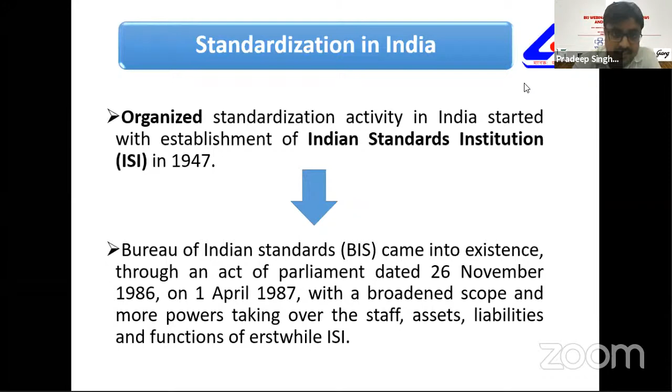standardization in India. Actually, for every good practice, there is a need of standardization. So standardization in India started with the establishment of Indian Standards Institution in 1947 before independence. Then after, Bureau of Indian Standard came into existence through an act of parliament dated 26 November 1986, on 1st April 1987, with the broadened scope of more powers, taking over the staff, assets, liabilities, functions of erstwhile ISI.

So now the genesis of BIS. As you see in the slide, first Institute of Engineers India acting as the Indian Committee of British Standard Institute since 1919. It means before independence.

Then after that, Government of India passes a resolution on 3rd of September 1946 for establishment of ISI, that is Indian Standards Institution, set up on 6 January 1947. After that, the new scheme came into existence, that is ISI Mark Product Certification Scheme under ISI Mark Certification Act 1952.

As you all know, the ISI mark is a well-reputed, popular, and renowned symbol in the field of quality control, quality aspect. We all are aware about the importance of ISI mark. So this ISI mark journey started in

1955-56. Then after, Bureau of Indian Standard came into the picture with the new name; ISI came into the picture with the new name Bureau of Indian Standard. It is a national standard body, established on 1st April 1987 under the BIS Act as a statutory body.

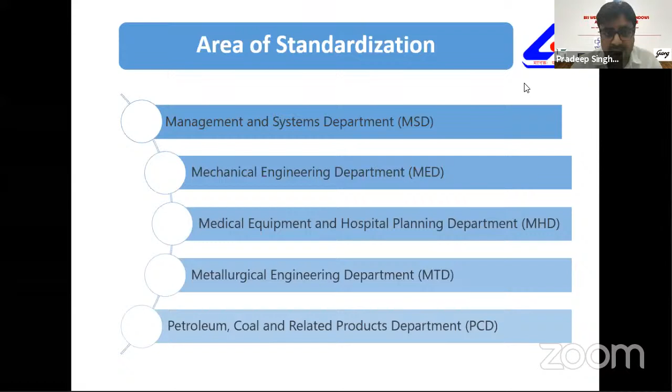So in total 16 technical departments, we are working in different areas and sectors of standardization. First, as you know, civil engineering department, then chemical department, electrotechnical department, electronics and information technology department, food and agriculture department, management and system department, mechanical engineering department, medical equipment and hospital planning department, metallurgy department, petroleum coal and related products department, production and general engineering department, service sector department.

These SSD1 and SSD are newly created departments. Now BIS is also working in the field of standardization in the service sector also. It's good news for our country that BIS has now started work in standardization in the service field also. We have textile department, transport engineering department, and water resource department.

So now I come to the civil engineering department, because we are more focused here on standards formulated related to doors and windows. These come under the civil engineering department's review. How do we work under the civil engineering department?

We have the Civil Engineering Divisional Council, under which these sectional committees are formulated. We have at present 36 sectional committees, like CED 15 and CED 11 are also sectional committees. Under 36 sectional committees, we have 33 subcommittees, then 62 panels, and 134 working groups.

Total number of members involved in all this type of work under CEDC is 3,210, and it's significant that we have formulated a total number of 1,768 standards under the CED Council. So I would like to highlight one thing, as you see the hierarchy, that the 134 working groups work under 62 panels.

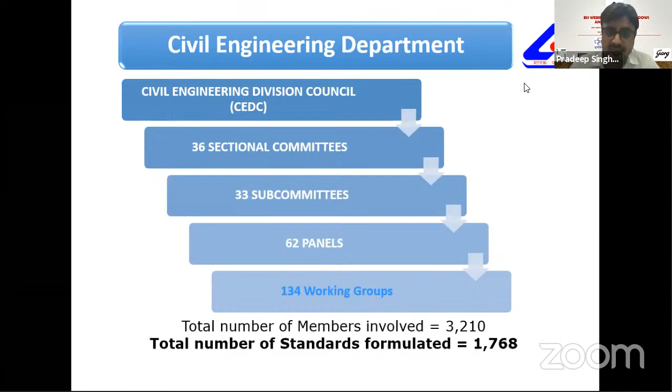Earlier we mostly had standards on a material basis. Now the overall worldwide scenario is changing and everybody is focusing on performance and safety. So now we are trying to update or modify our standards as per the latest technologies and demands, working in the direction of performance-based standards.

As I said, we have sectional committees under CEDC. As you see on my slide, we have sectional committees on cement, sanitary, building lime, floor, wall, structural engineering, timber. I highlighted CED 11 and CED 15 because we are only discussing those today.

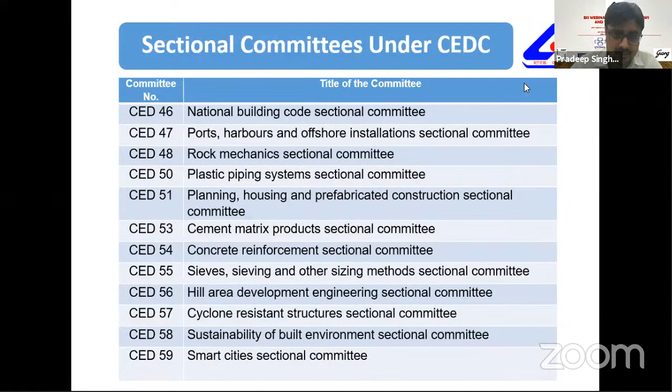Now let's see the composition of the sectional committee - how these sectional committees work and who are the technical members involved in the formulation of these standards.

So we have a good team and a knowledgeable team having vast experience in the particular area for which we are formulating the Indian standards.

First, a new work item proposal is put up either by a manufacturer, consumer organization, or any stakeholder who wants to develop a standard on their product, test method, or code of practice. So the new work item proposal comes to BIS.

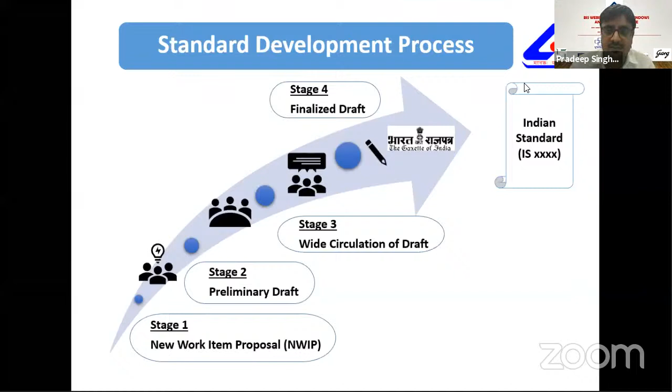So this is the whole process and whole activity, and the whole volume of work involved in developing any good, technically sound Indian standard.

Now I come to CED 11. What is CED 11? CED 11 is the Door, Windows and Shutters Sectional Committee. The scope of this committee is standardization in the field of doors, windows, ventilators, and shutters of any material.

We are also liaised with the international committee, ISO TC 162. We are the observing member in ISO TC 162, which is the Door, Window and Curtain Walls Technical Committee.

Under CED 11, to date we have formulated 27 Indian standards, of which product specifications are 22, code of practice 2, method of test 1, terminology 1, and other 1, which I will elaborate on in the next slides.

Now I bifurcate and segregate all the standards by material base, because at present we have material based Indian standards mostly. So for timber, wood and bamboo door, window shutters, we have standards IS 1003 part 1.

Part 2 for timber is specification of timber panel glazed shutters, IS 2191 wooden door flush door shutters, IS 2191 part 2 wooden flush door shutters, particle board, board face panels, IS 2202 part 1 solid core type wooden flush door shutters, IS 4021 timber doors, 4913 code of practice, 6198 specification of ledged braced battened timber door shutters, IS 15380 moulded raised high density fiberboard panel doors, IS 16073 bamboo jute.

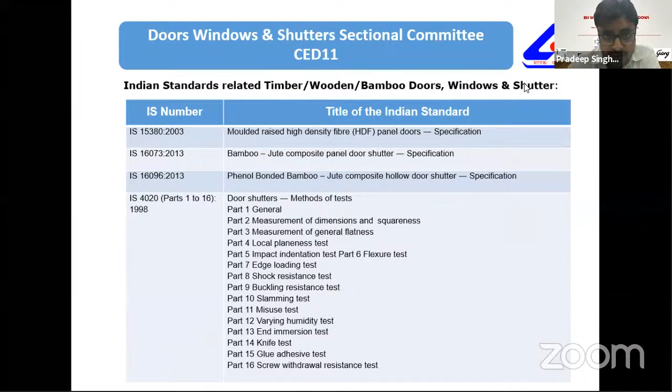Now the Indian standards related to metal door window shutters: specification of steel doors, windows, code of practice, specification of steel windows for industrial buildings, specification of aluminium windows for industrial buildings, steel door frames, steel flush door shutters. We also have two standards related to GRP or UPVC doors, GRP panel type door shutters, and solid panel type UPVC foam door shutters.

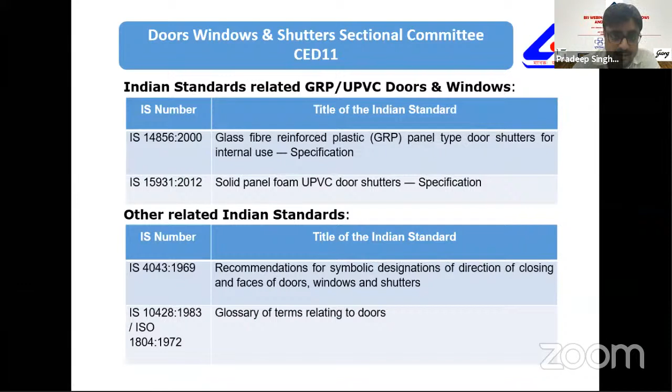We have other standards related to symbolic designation, direction of closing, and faces of door and window shutters, which is also a very important standard in terms of symbolic design. We have one glossary standard related to doors and windows.

Now, what is the ongoing work? This is a very important slide because we are working in the direction of new innovative materials, like regularly working on the formulation of a standard related to UPVC profile for door and window, which is now quite popularized in the market. We are also revising the flush door, wooden flush door standards, and revising steel door and steel door frames as per the latest technology adopted by different industries and reputed manufacturers in India.

One is the most important - I want to highlight that we are also now in the process of formulating a performance based standard, especially test methods like air permeability and water tightness. At present, this type of standard is not available in India, and most reputed industries are using international standards. So we think India must also have standards related to these types of test methods.

So now the next committee is the Builder Hardware Sectional Committee. The scope of the committee is standardization in the field of builders hardware such as door, window, furniture fittings like hinges, handles, sliding bolt, door closer, floor spring, panic hardware, etc.

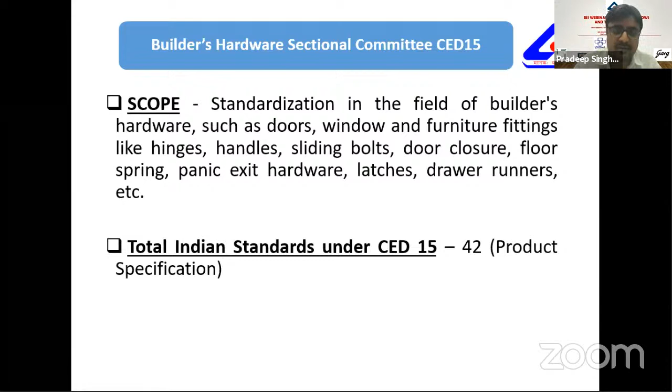Total 42 standards are already formulated under this committee, all product specification, meaning product conforming standards. So now I segregate these standards product wise. We have standards 205, 206, 362, 453, 1341 on steel butt hinges, which is a very popular standard in India for hinges. We also have standards on piano hinges and stainless steel butt hinges.

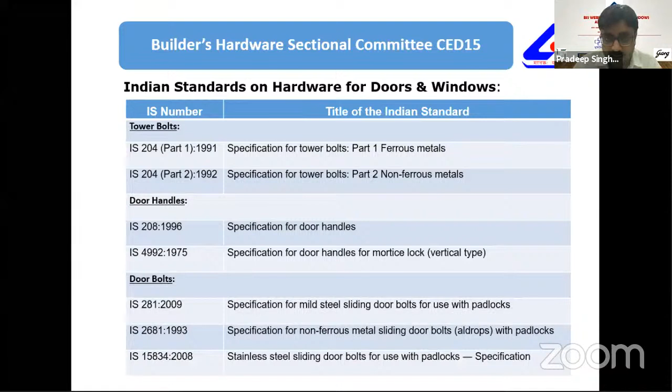Now we also have standards on other products: on tower bolts we have two standards, 204 part 1 and part 2, door handles 208, 4992, door bolts 281, 2681, 15834, sliding door bolts, stay fasteners, plastic windows 10019, mild steel stays 452, door closers, and Indian standards related to door stoppers and rim latches.

So what is most important is the ongoing work. We are working under the chairmanship of Sri Majumdar sir and under the member secretary Shri Hudson sir and Manoj sir. They are taking efforts to make standards good as per the latest technology, on the formulation of standards related to panic exit hardware, pull handles, stainless steel handrails, stainless steel door stoppers, revision of existing IS on door handles, SS aldrops, and SS butt hinges.

My request to all the stakeholders is to study or go through these standards so that you can also give your inputs to BIS in the formulation of Indian standards, so that a standard can be formulated as per the latest technology advancement, etc. So this is my presentation. Thank you everybody for listening to my presentation. Thank you.

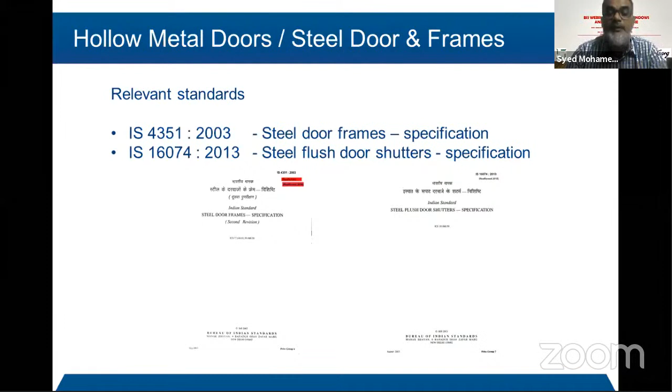Apart from this, I'd like to highlight that the entire construction industry has changed in terms of how the wall is constructed, and the kind of doors you're going to use in a building, because you've got multiple options available, as rightly pointed out by the director and chairman. There's a need to improve the performance of the product, or come up with a product that is more performance-oriented rather than specification-oriented. So with this presentation, I'd like to take you further into this.

First of all, I'd like to tell you that today we are going to talk majorly about the wall opening, the frame, and the shutter. Now you may ask, what is this wall opening all about? Because end of the day, if you take any particular standard, it starts either with the frame size or the shutter size. It doesn't talk about the wall opening.

So I just want to create a kind of relationship, because end of the day, most specifications, architects, or consultants always talk about the wall opening and not about the frame size or the shutter. Of course, we will talk about door hardware in relation to steel doors, just to give you a feel of how it works. Otherwise, there's a separate presentation which Mr. Sandeep Garg is going to take later in the day. I won't focus too much on door hardware, I'll just touch base to make sure you understand what is what.

So moving forward, I wanted to give you a brief on what is a wall opening width, because if you talk about any construction site, end of the day you're trying to put a door based on certain criteria. The criteria here could be application related, user related, or performance related. This defines what kind of product and what kind of door you're going to use in a building.

This is something I would like to showcase, to give a brief on how the international practice is being followed, because that is something missing in the current standard, which I'll also showcase at the end of the presentation so that you understand how to select the right door for the right application.

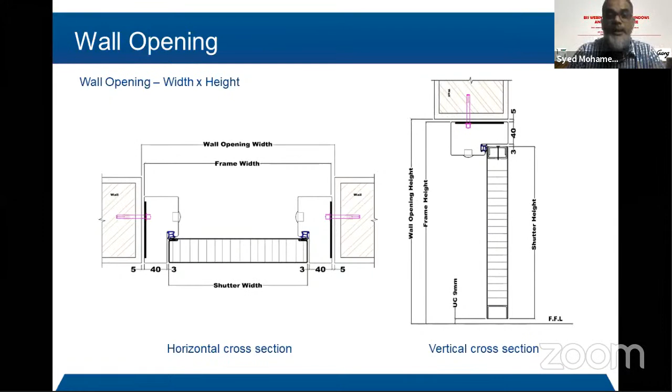Now we'll get into the standard as far as the steel door standard is concerned, 4351. It talks about different types of frames and profiles, and basically the material recommended in the standard is mild steel, galvanized steel, as well as stainless steel. It is available in various gauges and thickness, which has been recommended by the standard. I will also talk about this later in the slides.

Why is it that we have got multiple options when it comes to the frame? There may be reasons related to performance, or related to the application and the kind of usage. As the industry is changing, there are different types of profiles.

There are profiles without groove, and profiles with groove, because now people are talking about airtightness and water ingress—they want to control those kinds of things. So obviously there are multiple solutions available in steel.

Steel per se has been totally misrepresented, and people get a very different idea when it comes to use of steel in the interior of a building. I will showcase some of the extreme cases where this product has been used, and you'll appreciate the fact that this is something we have not presented properly to the industry, especially the construction industry.

So these are some of the frame profiles which are available. I'm sure there are many options available, because as I said, it could be design oriented. Most importantly, what you need to understand is there's a difference between a product and a custom made product.

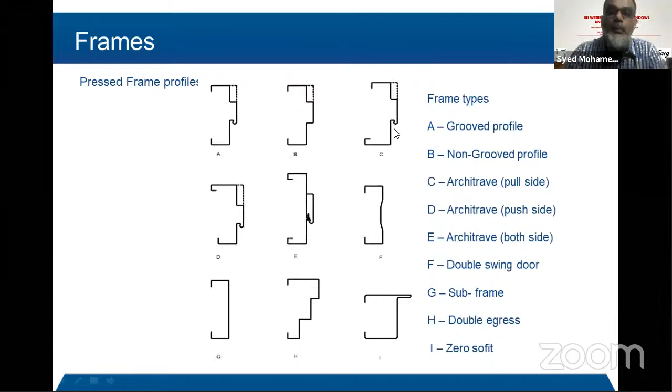Secondly, frames normally come in two profiles, or maybe many, but these are the most commonly used. One is a single rebate profile and the other is a double rebate profile. What is a single rebate profile? If you see this image, most of them are double rebate profile. Yeah, this is a double rebate profile, and this is a double rebate profile. But if the frame has the steel running like this, it's called a single rebate profile, which is what this particular frame is.

The next thing is the precautions we need to take, because when you talk about a steel frame, the first thing that comes to mind is how the hardware is mounted onto it. In wood, you have some kind of mass so you can put any wooden screw and tighten the hardware. But with steel, frames normally come with a lot of reinforcements and preparation done to make sure that whatever hardware has been identified for that particular application can be mounted with screws, no welding.

This is one important feature of a steel frame: all the hardware that goes onto the door has to be predefined and predetermined so it can be prepped in the factory, with no work done at site. So when the frame leaves the factory, it's complete, either in primer, painted, or whatever color you're looking at. There's a recessed preparation made inside the frame to take the hinges. Apart from that, you also have a back plate given on the frames at various intervals to make sure you're able to mount it onto the wall with some kind of anchor, based on whatever the wall material is, whether it's hollow brick, brick, or concrete, the anchors keep changing.

Then there's the protection you provide to make sure that when you pour some kind of cement slurry or puff inside the frame, once it's installed on the wall opening, all the hardware preparation made on the frame also comes with a kind of guard, a mortar guard, so that if you're pouring liquid slurry inside the frame, it doesn't get into the holes of the screws meant for taking that particular product or plate to be mounted at the time of installation. This is just to give you a feel of the kind of detailing and perfection needed. Now, the biggest challenge is that though we've created something on the frame in terms of hardware preparation, how do you make sure this is matching with the shutter?

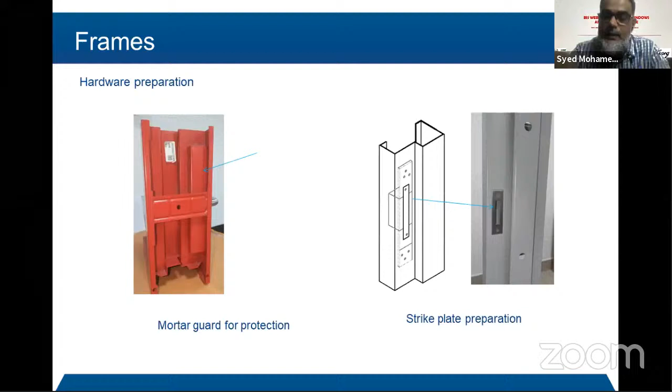So I'll take you further inside this particular presentation. There are a lot of dependencies when you talk about frames. What kind of dependencies are we talking about?

One is, of course, the wall depth. One is the wall opening, the other is the wall depth. There are 6-inch walls, 5-inch walls, different types of wall depths available. So you need to have some idea about what kind of wall depths you're looking at, and what kind of architrave, or whether smoke seal is required in the frame or not, or whether you just want a double egress kind of frame. So all these things you need to understand before you design what kind of frame you're going to provide.

Apart from that, what kind of shutter is it going to take? Is it going to be wood or steel? If it is wood or steel, what is the thickness of the shutter? These are certain things, because once the steel frame is press braked, you cannot alter it. It has to take that kind of product. That's it, there's no two ways about any alteration, unlike a wooden door or wooden frame where there is a possibility that you can always chisel. I'm not talking about pre-engineered wood, I'm talking about a normal, traditional way of doing things.

So when you talk about the frame rebate, where the shutter is mounted, we also need to know what kind of thickness it's being prepared for. Apart from this, there is a lot of hardware that goes onto the frame, so we need to understand what kind of models or what is the make of that particular product. Is there any template that needs to be followed? Because we are talking about consistency in manufacturing, this is not a single frame and a single shutter being manufactured. It's about understanding the entire requirement and documenting it in a manner that, when the product reaches the site, your performance is totally dependent on the kind of installation you're going to do. As far as the product is concerned, you can be rest assured that you won't find any deviation, unless you have already made a mistake in the complete preparation of the kind of hardware you're going to take onto it. So this is very important as far as the frame is concerned.

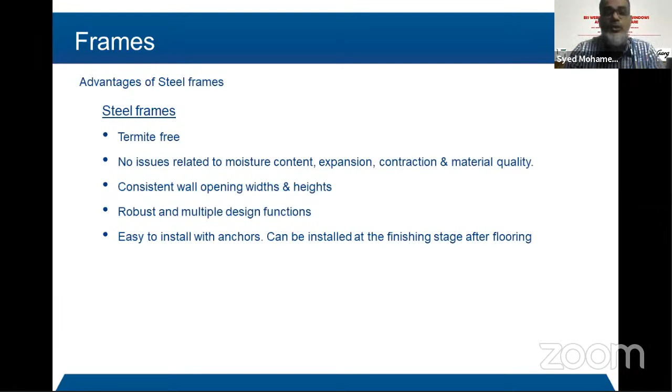One important feature is that the entire transition from the conventional method of preparing an opening and then putting the frame before the shutter is installed has completely changed. Now you reach a stage where your flooring is completed, your plastering work is done, and you've got some kind of wall putty placed to get the first rough surface, and then you install the frame. So this is one singular advantage you get with steel frames.

Let's move on to the steel shutter, because as mentioned, there's a standard, IS 16074, which talks about steel leaf or shutters, and does not include the frame, since there's a separate standard for frames. There too we find multiple materials defined for manufacturing a door. Pre-coated steel is an addition there, because that's not used in frames, but it's mentioned in this standard. It also comes in different thicknesses, whether it's 1.6 mm, 1.2 mm, 0.8, or 0.6.

When you talk about the shutter, the first thing that comes to mind is the basic construction. Normally this is called a sandwich panel shutter or double skin shutter. Basically it has two skins of steel, and in between you have an infill material. This infill material depends on what kind of product you're looking for: a fire door, a normal multi-purpose hollow metal door,

or maybe a lead lined door, or an acoustic door. So the infill material changes according to your performance requirement, and the thickness can also vary.

Obviously the standard doesn't talk about any particular standard thickness, but we recommend there should be a standard mentioning the thickness, because your hardware preparation is all dependent on the thickness of the shutter. Normally internationally they mention it as 1 3/4 inch, which is nothing but 44 mm. So this is where the shutter thickness starts, and it goes up to 60 mm also, based on the kind of shutter you're making.

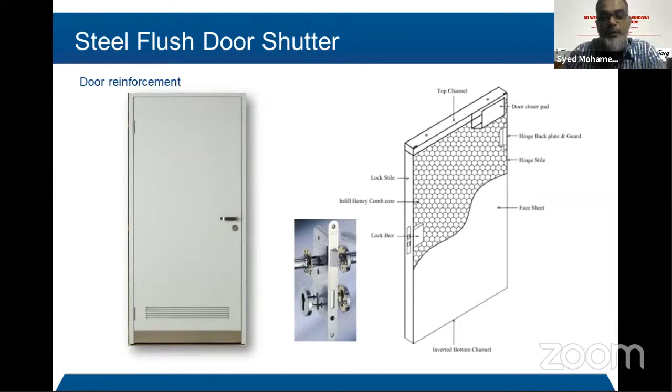This is a product which shows various types of provisions that have been made. One of them is that a louver has been provided onto this particular door. We'll get into details of what kind of provisions you can make - you can make a vision panel cutout, you can make a louver cutout. These louvers are sight-proof, which means you cannot peep in. Unlike wooden doors, where if you want to see through, you can still peep in, these louvers are sight-proof louvers.

Then you have the vision panel, which comes with reinforcement, so that whatever cutout you're making inside the shutter, you're not weakening the overall structural rigidity or the performance of the door. Basically, you're giving more reinforcement, and it comes with a very sleek, clean clip-on arrangement for the vision panel. Of course, with a double door, you need to make sure that the gap between the active shutter and the inactive shutter is not see-through, so you provide an integral astragal.

What I'd like to highlight here is that the steel door manufacturing industry has come a long way in terms of product design and manufacturing. It's been a long journey - 30-40 years back, this was already being followed in countries like the United States and UK.

Those manufacturers have actually mastered the manufacturing of hollow metal doors, and we're just following it. But this is definitely the right move in terms of creating an alternative material available for public buildings and government organizational or government-sponsored projects. Apart from this, when it comes to hardware preparation, I'd like to showcase an image of the lock fixing arrangement.

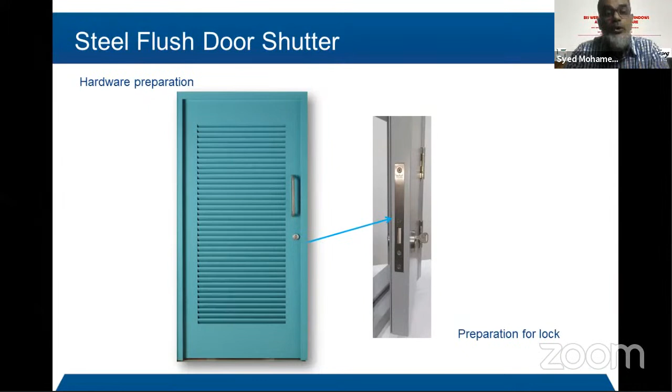This is another door showcased here, a louvered door normally used for transformer rooms. Here also you'll find a lot of dependencies, because whether it's frame or shutter, when it comes to steel, they have to go along together. There's no two ways about it, because so much planning goes into it. Let's assume you're buying a frame from one supplier and want to use a shutter later from another. It might not be possible, because the templates will never match, unless the supplier provides the exact level at which the hinge cutout and the lock cutout have been made. So maybe we should look at making this a standard for one single product, because this is how the product looks as a complete assembly.

There's another thing I'd like to highlight, about the various types of applications and infill material, which I've already spoken about, and the kind of hardware preparation made onto the door. These are standard, whether it's frame or shutter, more or less it has to be defined.

Let's look at the critical key advantages of a steel shutter. Of course, one is termite proof. An important feature is that they look beautiful when factory finished, and you can get them in multiple finishes. Now that the industry has evolved, you'll get steel doors in wood finishes and various laminated finishes also. This is another important milestone the door industry has achieved.

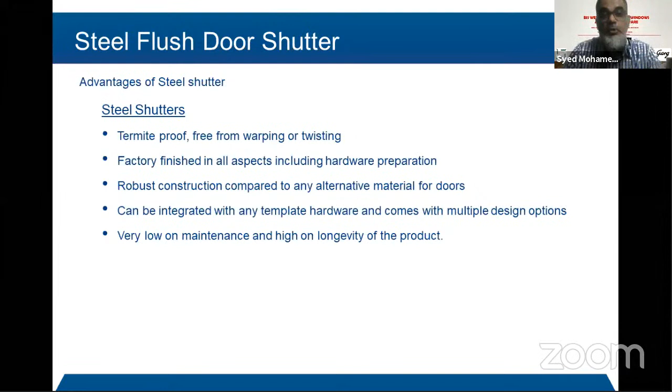When compared to any other material, you talk about a wall, until unless I go and scratch the wall, issues won't get noticed. But a door is something every day, different kinds of people use it. You don't know the guy who's using the door, or even what kind of hardware has been put and how to use that hardware. So these are the challenges which normally doors, steel doors, or for that matter any door will have. So let's get on to the applications.

Steel door, as far as construction is concerned, we've already seen the challenges and what we need to look at when it comes to the frame and shutter, but we also need to understand where it is being used. Steel doors are being used in clean room doors, especially in pharmaceutical companies. The majority of pharmaceutical companies use clean room doors made out of steel, because they require class 1000, class 10,000 kind of quality requirements. So obviously they use steel as one of the materials for doors.

You also have the majority of fire doors used in the country, which are mainly made by steel. People used to have wooden fire doors, but they have migrated from wooden fire doors to steel fire doors for multiple reasons. One, it has longer durability and can take any kind of hardware needed. It can also have very good different kinds of finishes. Most importantly, you can be rest assured about the quality and performance of the product, because the sheets, thicknesses, construction, and infill are all predefined. That's one important feature about steel fire doors.

Then you have acoustic doors, which are also available, where people want some kind of acoustic performance, especially for convention centers. People have started using acoustic doors made out of steel.

Glazed doors, I don't have to tell you, because it's now a trend that people use a lot of glazing and glass into the building. One alternative is steel, but when it comes to a fire-rated glazed door, you cannot use aluminum—you will go for steel. So this is one product you can also look at when it comes to steel.

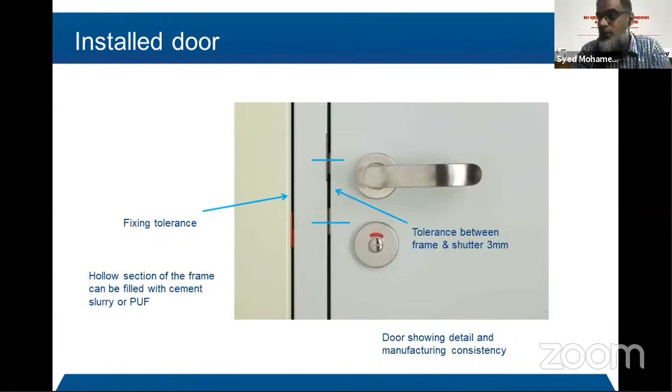Before we get into further details on how to select the right shutter, I want you to understand that when you talk about a steel door, a metal door, or an HMPS door, it is not just about the frame or the shutter—it is about a complete assembly which has to include the frame, door leaf, hardware, and the glass.

So this is something which everyone should understand clearly: why steel door as a complete assembly? I think I've been discussing this throughout my presentation, but just to highlight again before we conclude this session.

Mr. Syed, sorry to disturb, we have to stick with the time, please ensure. Okay, thank you. Another thing, carry on, sir.

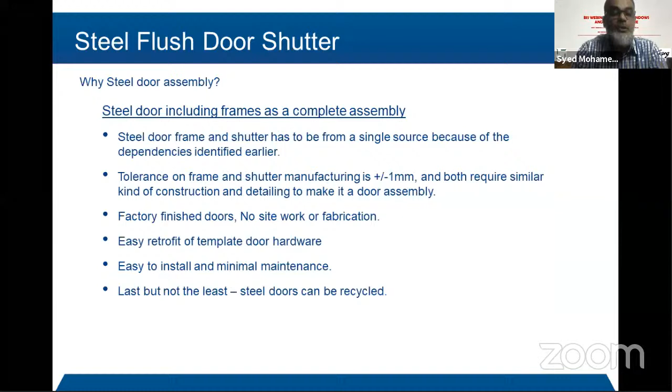Carry on. So one is that steel door shutters, of course, have to be from one single source because the tolerance of manufacturing is plus or minus 1 mm. They can be factory finished. Most important, steel doors can also be recycled. This is another important feature of steel doors we'd like to highlight.

What is the best practice for steel door selection? You'll find there are a lot of sheet thicknesses mentioned in the frame and in the shutter. How do you define this? This is an international practice.

Basically, they define the requirement in terms of standard duty, medium duty, heavy duty, and extra duty. Extra heavy duty is used in areas where there's no control and people will just abuse in usage. Similarly, medium duty is where you will take some care.

So we have mentioned it because we are running short of time. I'll definitely share this presentation with the organizers and you can take it from them. The material and frame configuration - if it's standard duty, what should be the frame thickness and shutter thickness - this is something that's included, or maybe we should look at including it in a future amendment.

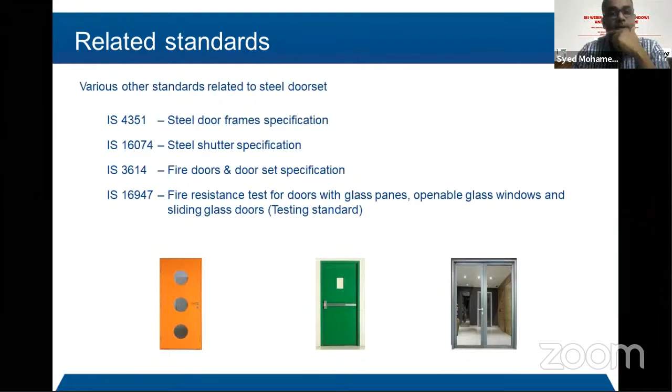Apart from this, there are certain other related standards where the steel door is being used, just for your reference in case you would like further details.

Hardware - I'm not going to spend too much time on it because we are running short of time, as Mr. Sandeep Garg will go into detail. But the only thing I'd like to highlight is there are two types of hardware: one is fire rated and non-fire rated hardware. I'll leave this session on hardware for him to take that particular product line.

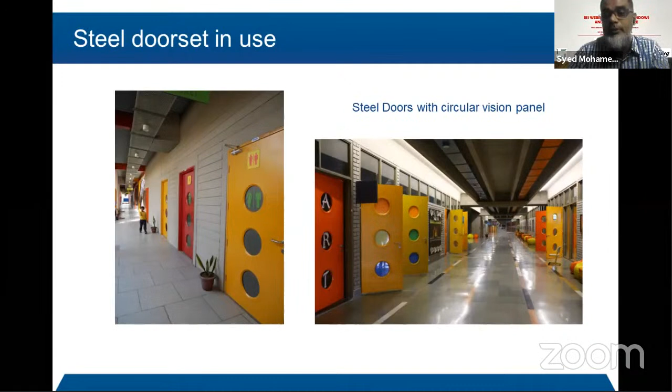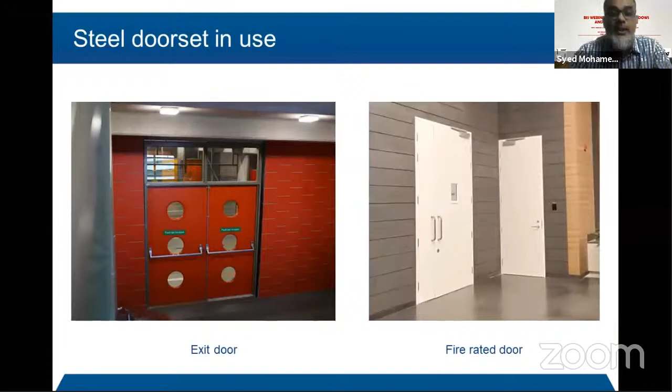This is one of the projects where you can see steel being used for glazing purposes in terms of doors. Then you have exit doors, various rooms and applications where you can use steel doors - they look aesthetically as good as any other material. These are partitions, again made out of steel.

Currently you have fire-rated doors and partitions coming as a combination. Then you have a university where they've used steel doors in the rooms. And as I told you, steel is also being used for main entrances as an alternative. So this is one thing.

I can showcase many more such pictures, but I think we are running short of time. I'd once again like to thank the panelists and the entire team for giving me this opportunity. I hope the presentation has given you some insight into the product, and we look forward to more such sessions in the coming days. Thank you, thanks a lot.

Thank you, Syed Mohammad saab, for the great presentation and full details provided to the audience, and to me too, on the steel doors, clarifying the concept of the steel door frame and the infill material we have used. I request a panel member to give some more focus on that, especially Shri R.K. Kakar saab - would you like to say something on it?

Well, it was a splendid presentation, very exhaustive and very informative. We would like to discuss more on this, but since we have other panelists also to speak, let's end at that. Okay sir, thank you sir.

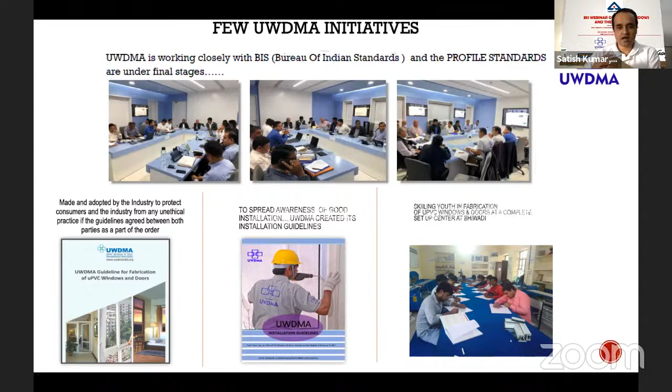To take things further, we also work with NAPS and introduced our own skill development center in Bhiwadi. We are working with other members to organize different skill development centers in different parts of the country. We have been conducting webinars, seminars and conferences in different parts of the country to educate people about how UPVC windows and doors are suitable, how they have to be manufactured, and how they have to be installed.

When it comes to PVC, there's a lot of confusion. So what is UPVC? UPVC is essentially around 80% PVC, then we have certain additives. Out of the majority of players in the market, the UWDMA members, the UPVC window and door manufacturer members, have taken a conscious decision to move away from lead. So I can assure you that all UWDMA members are producing lead-free profiles.

The stabilizer used is calcium zinc. There's a certain percentage of titanium dioxide which is used to make the PVC profile UV resistant. We add impact modifiers so that when the doors and windows are installed, they remain stable and can take care of any kind of impact. There are certain processing aids used during the extrusion process, and certain fillers, mainly calcium carbonate, used to give impact strength to the profile.

The UWDMA members, when the association was formed, one of the first decisions was that the profile should be stable for Indian climatic conditions. As most of the technology is coming from Europe, there was apprehension about whether the systems could be suitable for Indian climatic conditions. So the members joined together and said, okay, let's adapt for the Indian climatic condition.

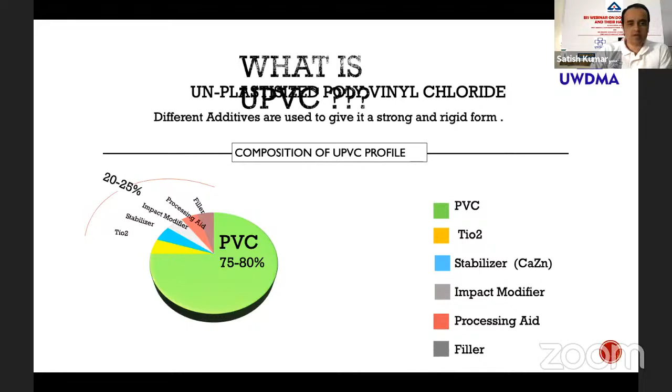So I was talking about PVC. PVC basically has around 80% PVC, and then we have certain additives like calcium carbonate, stabilizer, calcium zinc, titanium dioxide which gives UV resistance to the PVC profile, and certain impact modifiers and processing aids.

One of the conscious decisions the association took was to ensure that the PVC profile coming into India, at least for manufacturers who are members of UWDMA, offers a system that is going to be stable. It was decided that in Europe, the climatic condition is less than 22 degrees centigrade, and the UV radiation is less than 5 gigajoules.

Whereas in India, the UV radiation is much higher, around 8 gigajoules. So when we look at a 5 years equivalent for the artificial weathering test, we decided the profile should be tested for 16 gigajoules for 8,000 hours. This is close to 1 year of testing or exposure to UV radiation, so that the profile is stable for the market.

When it comes to performance of doors and windows, the PVC profiles or windows also go through a similar climatic or weathering condition. So they have to be airtight, watertight, and wind resistant. For airtightness, we are looking at different classes, and as we are part of the door window committee, this has also been included.

It starts from around 50 Pascal, going up to 600 Pascal. We create a window or door and suck the air inside to check the air infiltration, and based on that we analyze how airtight or watertight the window or door is.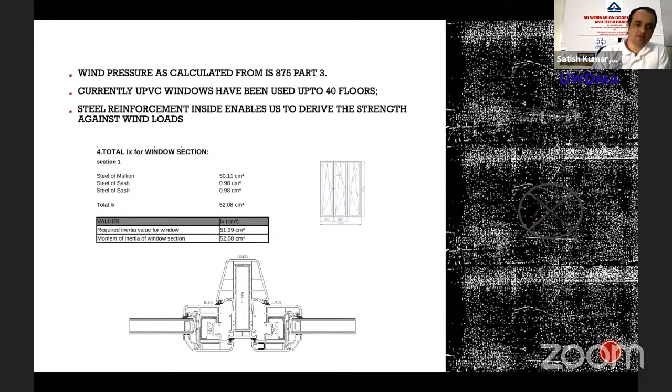Currently there are a number of buildings up to 40 floors where UPVC doors and windows are being used. I'm sure in the future there will be other types of buildings or heights where PVC doors and windows can be used.

One of the major requirements for doors and windows nowadays, with a lot of air-conditioned buildings coming in, is the UW, or heat transmission through the door and window. PVC offers a big advantage for thermal insulation—being an insulating material, it prevents heat from either coming inside or going out.

This is also being addressed by BEE, which is coming out with an energy label for doors and windows. This is extremely important because around 25 to 30% of heat loss is through doors and windows, so it's not just about glass. The UW comes from the UF, or frame property, the thermal coefficient of the frame, and UPVC definitely has a better thermal coefficient compared to other metal doors.

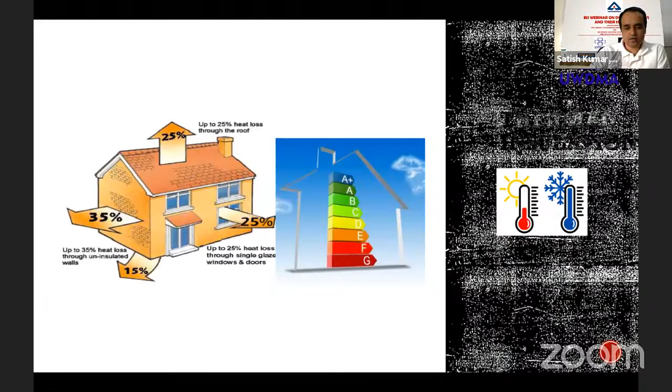Noise reduction is important as we are experiencing a lot of traffic noise with the increase in urbanization, and a lot of construction activities across the country which bring in a lot of noise.

The biggest advantage with PVC is you can replace or increase the glass thickness by replacing the glazing bead, without having to change the frame of the shutter. So by switching to double or triple glazing, you can achieve higher noise reduction.

Tests have found that up to 35 decibels of noise reduction can be achieved with a simple door or window, and with special high performance UPVC doors and windows, you can go up to 44 decibels in noise reduction. There are some more advantages when it comes to UPVC doors and windows.

First and foremost, PVC is non-corrosive, which adds a lot of value to the life of the doors and windows installed in the building. The average estimated life is around 35 years, and the material can be recycled up to 10 times, giving an estimated life of about 350 years.

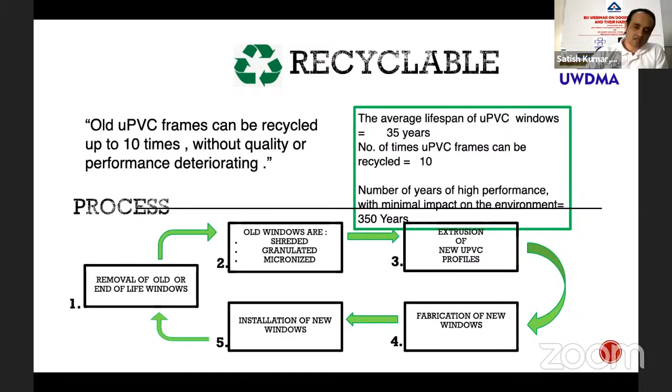In Europe, this practice is very prevalent because of the long use of UPVC there, for more than 45 to 50 years. Currently about 200,000 tons of UPVC is being recycled there. In India, once usage increases, a lot of these windows and doors will definitely be recycled as well.

As for weather resistance, UPVC with the right compound is definitely weather resistant, which is being tested across the world. For tropical climates, a number of tests are done to ensure suitability for this climate.

One such test is the heat reversion test, where the profile is placed in a chamber, heated up to 100 degrees centigrade for 60 minutes, and then checked to see if the expansion on the front and back is the same, or if the contraction after cooling is consistent in direction, so that warping of the profile does not happen.

Further, it is heated up to 150 degrees centigrade in a heat aging chamber for 30 minutes, and checked for any blisters or cracks forming on the profile.

Then the Vicat softening temperature test is done. The heat aging and reversion tests use dry air, whereas the Vicat softening temperature test uses oil. The profile sample is immersed in oil, and the oil is heated up. The standard requires that the profile be stable up to 75 degrees centigrade.

When the oil is heated, a pin is used to pierce the profile to check at what temperature it can be pierced. The standard requires that up to 75 degrees centigrade, the pin should not be able to pierce the profile, and tests have shown that most profiles exceed 83 degrees centigrade.

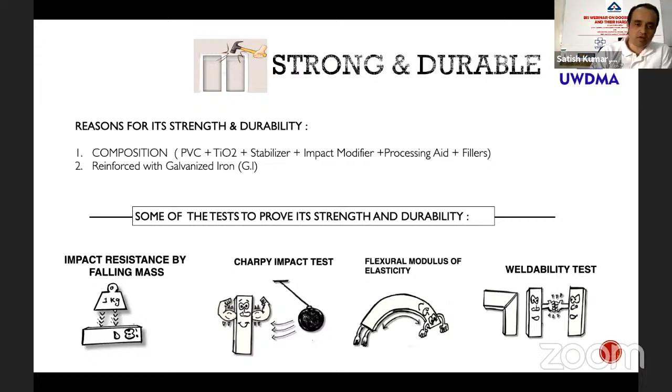So together, I would say that UPVC doors and windows are very much suitable for the Indian market.

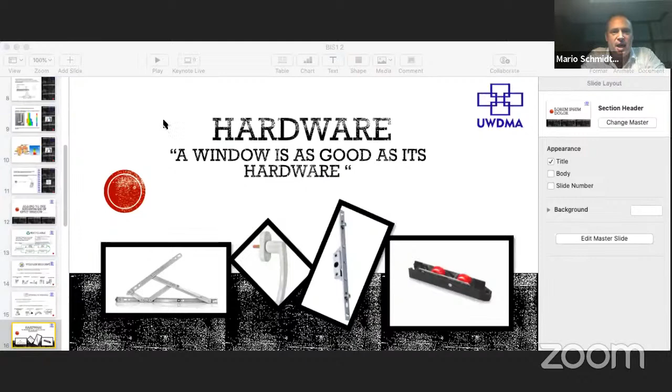What we are doing with the standard is getting architects as well as decision makers and fabricators together, because as of now, everyone is making the symbols the way he would like to do it. There's a lot of confusion sometimes, a lot of misinterpretation, and a lot of misunderstanding also.

Next slide, please. Next slide, please.

It is also very important to understand that not every window has to fulfill all the parameters, because we know whatever extra is needed, for example safety protection and preventing mishandling by children so that no one can fall out - the hardware has a restriction so a child can't open a child lock. This is, of course, commercially an add-on, which may not be needed in a normal window on the ground floor in a private residence.

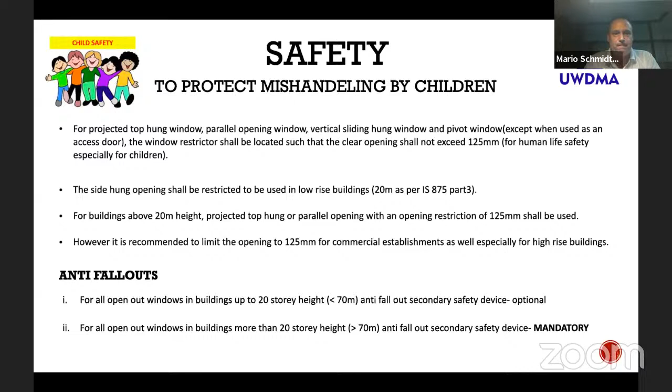Next slide, please. Next slide, please.

Hardware for air tightness. For example, if I have a building without air conditioning, then air tightness is actually not a topic at all. But in an office area, or in my bedroom where the AC is running, and what Satish also rightly said, we are working with the BEE on an energy rating.

When air conditioning is there, I should definitely have air tightness, so that I'm not cooling the outer environment but just the room where I am, locked in, without any loss of energy or air entering. As Satish rightly said, based on pressure, when there's no wind my locks are okay, but when a sudden wind pressure comes, my lock still has to keep the unit airtight. We want to implement the European standard, so that up to 600 Pascal of pressure, there should be almost no air coming in, and the air infiltration allowed per square meter of window area per hour will be defined in the standard.

Of course, same again. We have the IS 875 part 3, which talks about the safety of the building, but it just says that during the heaviest monsoon and hurricane, my window should not fly away. What we are proposing now with the new window standard, as Satish rightly said, is more than 3 or 4 liters per square meter per minute, defining things based on the Indian need because of the Indian climate and our specific conditions.

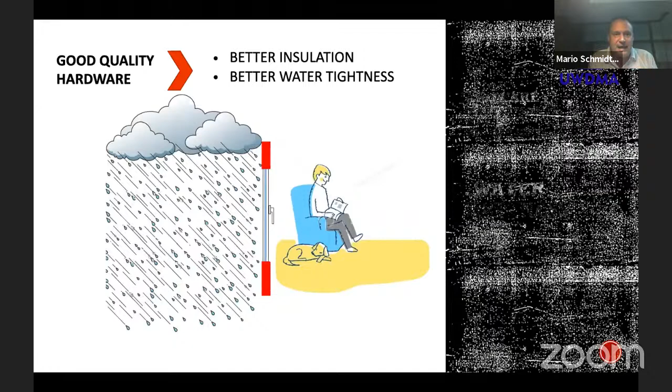This is the same—wind and water go together. One test is wind, where we can hear whistling, and with proper hardware that locks all around, the whistling noise in a UPVC window will not be there. When we say we're testing up to 2000 or 2500 Pascal, even at this point, the shutter is not allowed to fly away.

This is different when I test just a glazing or facade—there are no hardware components, just my aluminium or UPVC frame and the glass. But whenever a glazing and openable option comes into picture, it's important that this option withstands the exact test result that a fully fixed glazing would also achieve.

Same for noise. If I'm living in a remote area without noise problems, or in a living area with some traffic noise of around 50 or 55 decibels, then I don't have to go for high performance insulated glasses and hardware. I can put the best frame and the best glass in, but when my hardware is not sealing the window all around, it's the same as having a door kept an inch open—it's of no use.

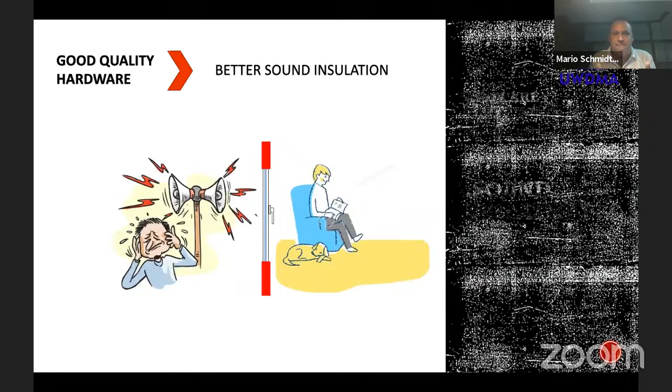This is where, as we initially said with UWDMA, we are presenting a complete system, similar to what Shakti Herman said. This is a revolution happily and luckily taking off right now in India, so that a specified tested solution comes from a specifier, and it's not the end user or contractor who, on his own risk, has to select all the component parts—and when it fails, he can't go to anyone. But if I go for a selected system and use the parts according to the system, I can be rest assured that whatever is tested, if I produce and install it the same way, I'm going to get the performance I'm looking for.

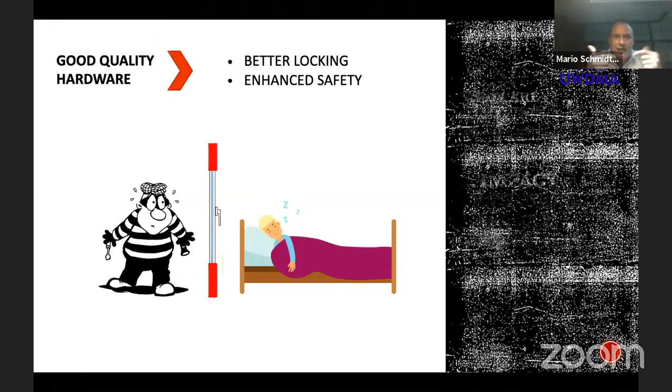But then again, price is also going to go up accordingly, and the specifier will need to know which particular window will fit which glass. This will create transparency to the entire industry and to the consumer, so that real specified requirements can be chosen for the first time. And then in terms of price escalation, it can be justified by the input and the tests it has passed.

Cycles are also very important. For a private house, maybe 10,000 to 20,000 cycles will give a lifetime of around 20 years. In an office area with frequent use, maybe 10,000, 20,000, 30,000, or 50,000 cycles, whatever is contracted and agreed, is going to pass in this time. When someone says 10 years or 15 years, it has to be tested on the specified cycles, and I'm really happy with the standard which is coming, because it's going to give a lot of transparency.

When a product is priced at parameter X, I can expect certain cycles. When a product is at Y, and the test certificate says grade 10, 1 lakh cycles, then it's designed accordingly and everything is much stronger. The material used is a much better grade, or bigger, or whatever. This is really important so that the consumer, with this standard, has the right and the chance to select the right product for what he is looking for.

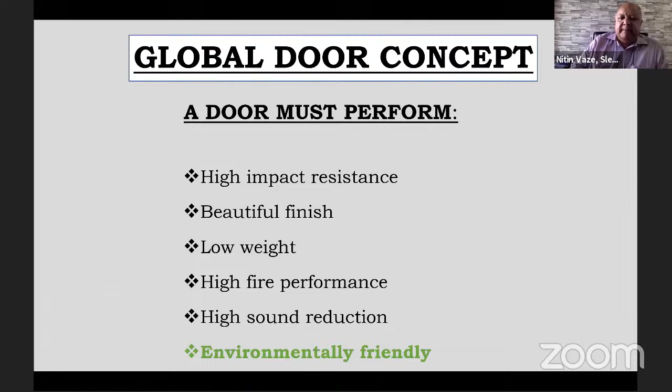Basic myths of the door in India: a heavy door is a better door. A heavy door provides more security, and a door provides for privacy by default. Actually, in reality, a heavy door warps during climatic changes, allowing outside hot or cold air to enter, causing losses in energy.

Second myth - a heavy door really does not provide any security. The thief always breaks the lock. You will never, if you Google and see, come across any incidents where the thief has broken the door. He is always targeting the lock. So a heavy door really does not provide any real security, the way Indians perceive it or their perceptions are.

Doors provide for privacy - yes, to a certain extent. A door provides for privacy of sight. But what about the privacy of sound? In India, this is a very big misconception that when we close the door, we think that whatever sound is inside the room does not percolate outside. But this is absolutely incorrect.

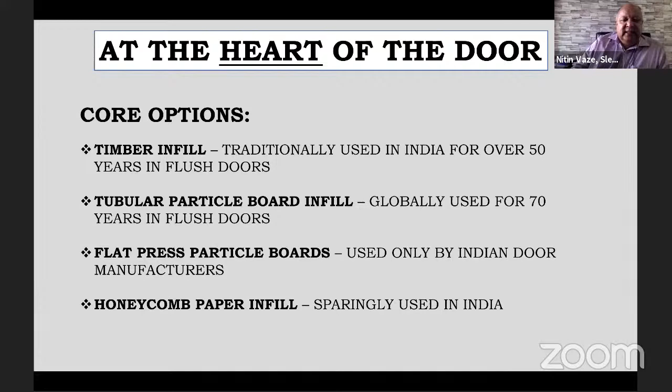Then the next option is tubular particle board infill. This has been used globally for almost 70 years as an infill for flush doors. Flat pressed particle boards, which are used only by Indian door manufacturers, and honeycomb paper infill, which is sparingly used in India.

So we will go for the hard diagnosis for all these cores. First is the timber infill. This is the most common infill used in India for more than 50 years. But what has this infill done? It has only increased the demand for timber and its utilization.

There are better things to do with timber than to just fill the door, which does not provide any performance benefit. So if we take into account one door of a 7x3 size with a thickness of 35 millimeters, almost 80% of the material is timber infill in it. It looks very nominal when you look at the timber filling requirement per door.

But India is building 20 lakh homes every year with an average of 5 doors per home. We are talking about 1 crore doors, and that is a massive timber filling requirement just to fill the doors. Think if so much timber filling could be saved and we could make a lot of furniture components out of this.

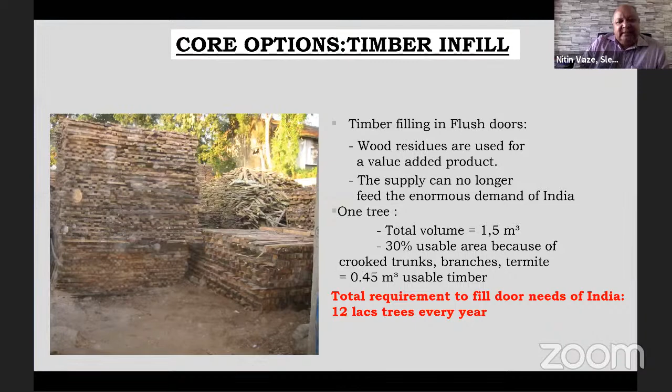Almost 12 lakh trees are being spent in filling of doors. It's a huge wastage of essential, scarce natural raw material. We need to change, the world has changed. We need to go and eliminate the use of timber filled flush doors with engineered materials.

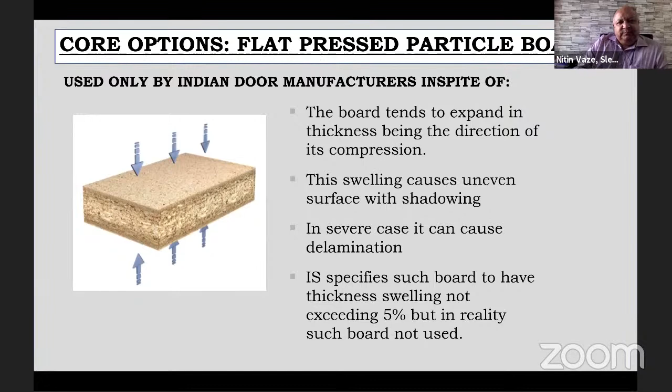The fourth option for the core is honeycomb paper infill. For the Indian market, combined with the other components of the door, it makes it too light, with no acoustical privacy and no fire protection. As a result, it has taken a very small market share of just below 5%, even though it has been available in the market for the last 20 years.

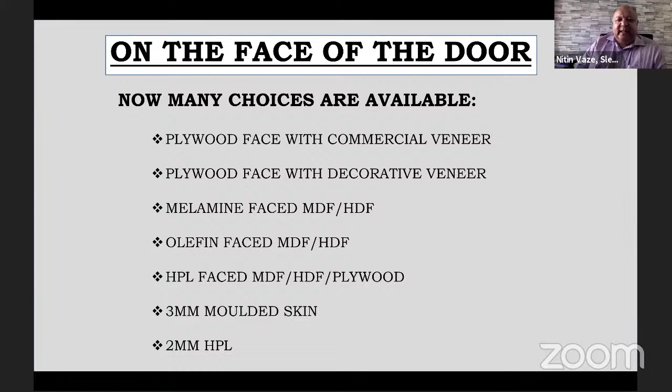The face of the door has also changed over the last 15 years. Originally it used to be only a plywood face with commercial or decorative veneer, but now other value-added options are available, like melamine faced MDF or HDF, olefin faced MDF, HPL faced with MDF, HDF or plywood, 3 mm molded skin, or a direct 2 mm HPL paste on.

The stiles and rails of the door, the good old seasoned timber, remains, but now engineered options are also available and extensively used by the door industry, such as moisture resistant MDF, oriented strand boards, laminated veneer lumber, and laminated strand lumber.

So this is as much as the box type construction goes. Now we come to the engineered doors segment, which is a fairly simple construction. You take a board of MDF or particle board, moisture resistant in its generic form, of a thickness of 30, 32, 35, or 38, depending on the thickness of the door.

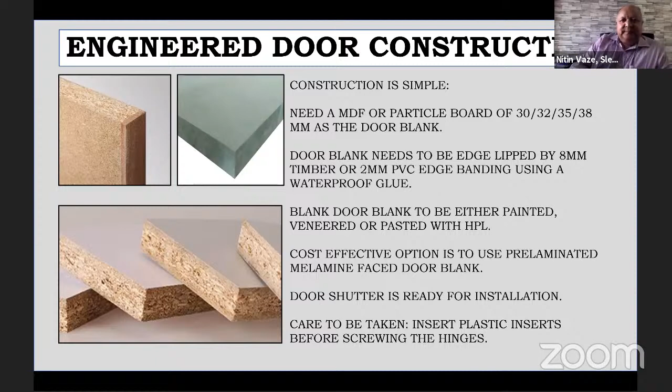Besides the commercial doors, you also have a long availability of technical doors: acoustic doors, which can provide sound acoustics from 27 to 44 decibels. We have to keep in mind that for every 3 decibels, the human ear hears half of the earlier level, and so naturally the prices rise with the increasing acoustical values one could expect. Fire door sets made from 100% timber are available from 30 minutes to 120 minutes.

Normally timber doors do not exceed this range. The third technical doors available are anti-burglary and anti-theft doors, made conforming to the UK standard PAS 24. Again, all these technical doors are a subject by themselves, so I don't think it is appropriate for me to cover within the present scope. Thank you very much for listening to me.

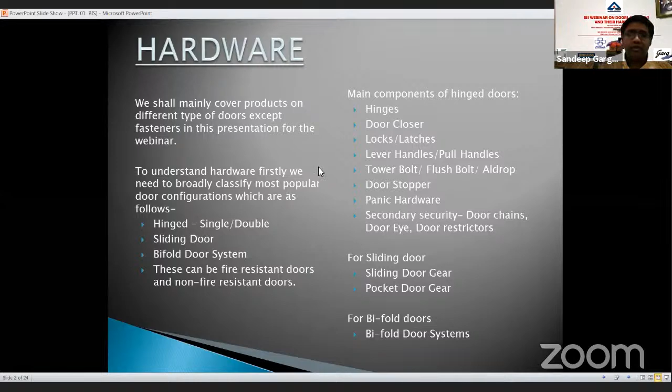Now, how do we categorize hardware? Internationally, it's categorized by category of use - whether it's for an internal door where the user will exercise care, or where it's likely to be abused, like in a public place where you have no control over how the door is used. Then there's the durability cycle, which can vary from 5,000 cycles to 10 lakh cycles depending on usage. Then door mass, depending on whether it's for a light door or heavy door. Fire rating - whether it's suitable for fire rated hardware or assembly. Then safety, security, and corrosion.

No single hardware or metal is suitable for all types of doors. For example, a mild steel hinge is good for use in northern India where we get some rain, but not good for coastal areas or bathrooms because it would rust easily. A brass hinge is good for coastal areas, but not on a heavy door because it won't give high endurance life. Similarly, satin finish stainless steel, the most sought after finish, gives very good aesthetic appeal but not high corrosion resistance.

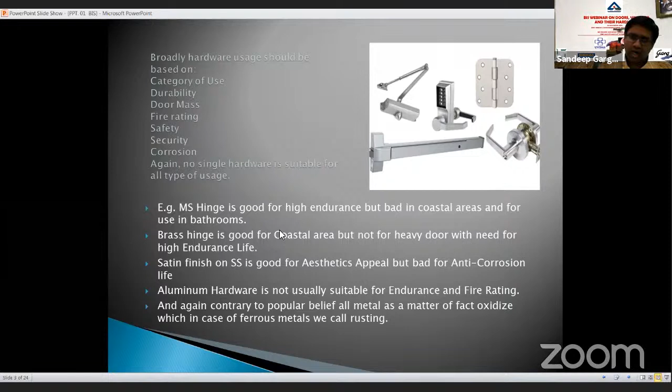We often say stainless steel is anti-corrosive, but the fact is no metal is truly anti-corrosive. All metals on planet Earth oxidize - we call it rusting in case of steel, but they all oxidize. Even brass, silver, gold - name any metal - they all tarnish.

Coming to hinges, which is the basic product that goes on a door, it is the most underrated product that we use on a door. Why underrated? Because we merely specify it and say use this hinge. But a hinge should properly be specified.

Hinges are of two types: single axis hinge and double axis hinge. On single axis hinge, you have butt hinge, flush hinge, bearing hinge, piano hinge, T-hinge, parliament hinge, railway hinge, all with their specific roles. A butt hinge is the most commonly used hinge in India.

Then you've got a flush hinge. The beauty of this hinge is you don't need to recess the door for its sake, you just fit and use it. Then bearing hinge, which on most fire-rated doors is the most popular hinge that we use. Then again, you've got piano hinges and T-hinges.

Parliament hinge has its own use when you want to have the door set parallel to the wall. We also call it projection hinges in some parts.

There are quite a few hinges not readily available in India at the moment, but are now coming, like a Tectus type or seam hinge or a 3D adjustable hinge. The major manufacturer at the moment is Simonswerk, but efforts are being made in India to make it locally. The best part is you fit the hinge on a door, and once you use it, it generally wears and the door starts to sag. Now you can adjust the hinge to bring the door back up to its original position without taking it off the frame. Rising hinge has got its own beauty.

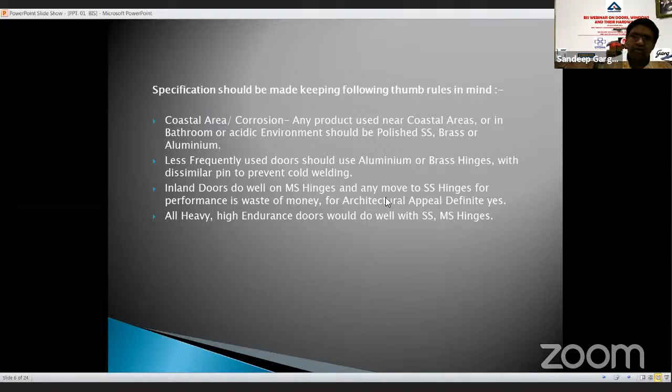Mild steel hinges are good for the northern belt, but they do not offer architectural appeal. Stainless steel hinges are good for any door because they give good aesthetic appeal and can also offer high endurance. Again, there was a question here on how to best fit a hinge.

If we are using a fire-rated door, we generally prefer to put a hinge in the center. Whereas if we are using a very heavy door, we like to add a fourth hinge, 200 mm below the top hinge. Again, I've shared the cycle, what is a suggested cycle use per annum for doors.

While deciding a hinge, we take care of door mass, endurance, type of use, corrosion resistance required, suitability for fire. Do we need security against theft? Suppose a thief is trying, he can't get through the lock side, he'll try and destroy the knuckle and remove the door. So we can add a security pin to improve that protection.

Again, there are various standards. Internationally, EN 1935 is the most popular standard for hinges. We've got various IS standards, and at the moment effort is being done to amalgamate all Indian standards, taking them onto a performance base as per EN and UL standards.

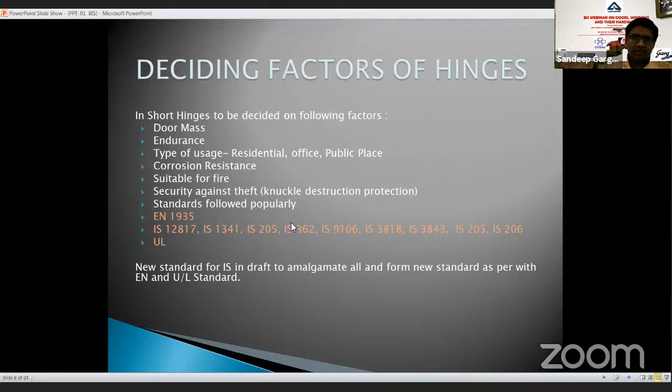Door closers are the second bit of hardware, which is pretty optional. In India, the most popular is the hydraulic type surface-mounted door closer. Other types are concealed type hydraulic door closer, electromagnetic type door closers, spring door closer, and floor spring with its accessories. Again, we base it on door mass, endurance, fire rating, category of use, and corrosion.

International standards that are followed are EN 1154, UL 228. We have got 4 Indian standards, and again, effort is being done to amalgamate these standards.

Next, we come to locks and latches. There are 4 types basically in use: biometric, electronic, magnetic, and mechanical locks. I shall be focusing on mechanical locks for this webinar.

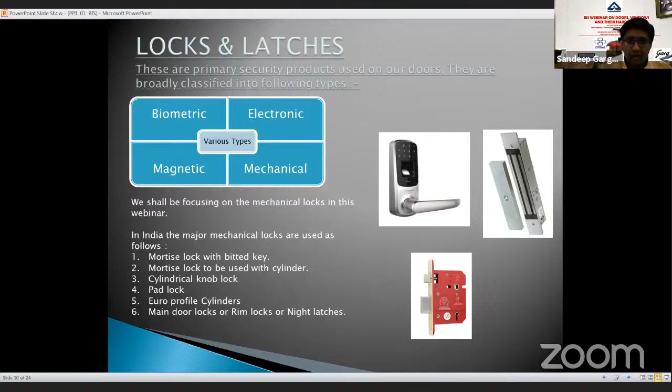Major types of mechanical locks used are mortise locks with bitted key, mortise locks to be used with Euro profile cylinders, cylindrical knob lock, which is most popular in most projects because of the low cost involved, then padlocks and main door locks, what we call night latches or rim locks.

Internationally there are more locks available, like code locks, multi-point locking systems, escape locks, construction key cylinders, etc. But these 4 locks are now being made by Indian manufacturers and would soon be joining the ranks of locks available in India.

Again, what is the usage criteria of locks? Most of the time, when we specify a lock, we specify the same lock for the entire building. But we should give a thought, what are the external doors where we need more security and where we can get away with lesser security. Like if a burglar is trying to enter, he'll enter through main doors or windows. That is where we should offer maximum protection, or a door where we are keeping certain valuables. We should be investing more on locks at these positions rather than other points.

Again, how do we classify what lock is better and what isn't? We did discuss about security, so we'll take 4 basic points. First is time it takes to pick the lock, or in simple terms, time to make a duplicate key for that lock. Second is resistance to drilling. Third is resistance to bumping. And fourth is resistance to mechanical destruction, using a snapping device or hammering.

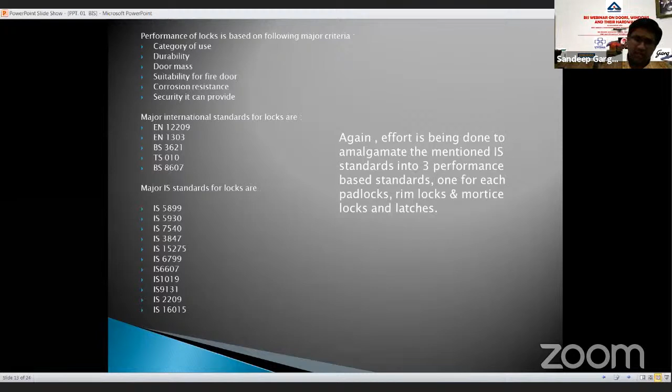Again, the basic performance of locks is based on category of use, durability, door mass, suitability for fire door, corrosion resistance, and security it can provide. Major international standards are EN 12209, EN 1303, BS 3621, TS10, and BS 8607. Then we have a lot of Indian standards, and at the moment the process is on to amalgamate these standards into 2 or 3 performance-oriented standards.

Next comes lever handles, which always take the most focus when we specify hardware. These can be made of brass, zinc, or stainless steel. Basic subdivisions are lever on rose or lever on back plates, in different sizes. There are 3 basic variants of levers: sprung lever, sprung-assisted lever, and unsprung lever. The basic international standard is EN 1906, and we have Indian standard IS 4992, which is currently under revision to make it performance oriented.

Next, pull handles. Similar to lever handles, these can be made of various metals. Basic classification is back-to-back fix, bolt fix, conceal fix, or plate fix. Known mainly for aesthetics, but performance is equally important. At the moment, the major international standard for determining performance is BS 8424. Indian standard IS 208 is currently under redrafting to take it to a performance-based standard.

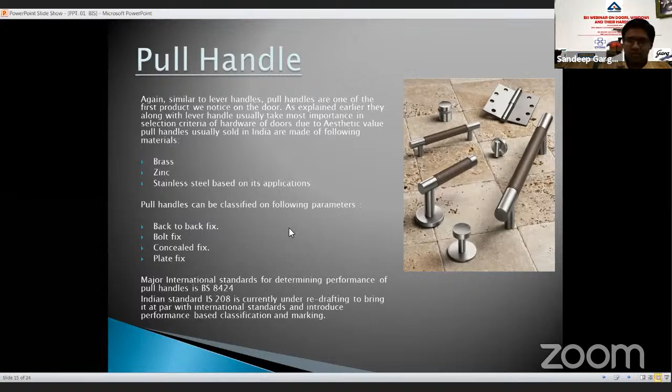Next is bolts, providing secondary security. Major types of bolts known in India for door hardware are tower bolts, barrel bolts, sliding door bolts, rack bolts, flush bolts, drop bolts, and indicator bolts. Uses vary based on how we want to use them, and we have EN 12051 as the major international standard for determining performance, along with various Indian standards, with the process on to amalgamate all these standards. I've just shown a few photographs of tower bolts, rack bolts, flush bolts, indicator bolts, etc.

Door stopper is the next hardware category. Its major role is to avoid the door hitting the wall. These used to be metal-based, like brass or aluminum, with the major role being to stop any hardware fitted onto the door, or the door itself, from slamming into the corresponding wall and causing damage. The role has now extended to keep the door in place, holding it so it doesn't close back.

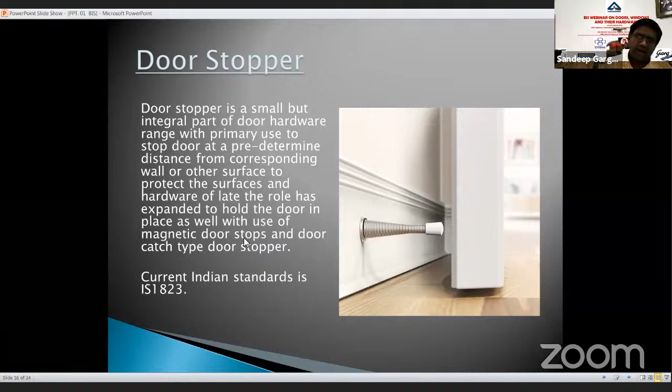The current Indian standard is IS 1823, and this will be coming under revision soon.

Panic hardware is another important product. Currently we are 100% reliant on imports for this category, and Indian companies are starting to manufacture it, hence the need to draft an IS standard soon. EN 1125, EN 179, and UL 305 are major international standards for panic hardware. It is fire rated as well as non-fire rated, but demand for fire rated far exceeds non-fire rated panic hardware. It should ideally be fitted in any building with more than 50 people, so there is a safe exit in case of panic. An Indian standard is currently in draft for the same.

Sliding door and wardrobe gear: architects here will understand that with a hinge door, when we fix a door taking up 3 feet, operating it uses an area of 9 square feet while opening and closing. India is a growing populous country and land prices are going up. So if we consider a house with 5 or 7 doors, we are losing roughly 70 square feet of area, and then add cupboard doors to that. Sliding door gear is a good option for doors and wardrobes to overcome this wastage of space and utilize that precious space for something useful.

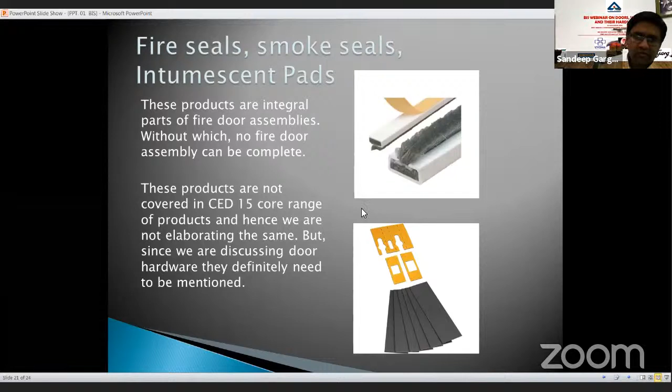Then you've got cabinet hardware. This wasn't here, but I thought it worth mentioning because it's an integral part of the CED 15 core range of products. Major products are cabinet hinges, drawer slides, cabinet locks, cabinet handles, magnetic catches, hasp and staples, ball catches, etc. At the moment we've got standards for cabinet locks as IS 729, and ball catches as IS 8756. But new standards are being drafted for drawer slides, cabinet hinges, drawer handles, cabinet handles, and so on. Thank you very much.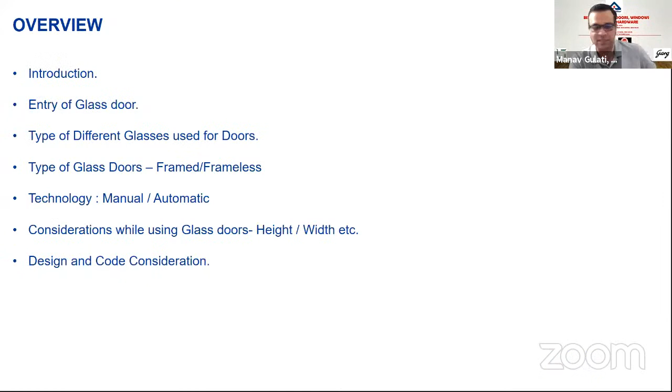It's a very vast topic, difficult to cover in 20 minutes. But I've tried to showcase the design trends in the industry. Being a code specialist, I'll share code details on this forum so we can have a separate session on codes. I've tried to cover the design intent of glass door technology and industry. Starting from where Sandeep ji finished, it's 4:43 now, so I'll try to finish in my time frame. Understanding building hardware.

Frankly speaking, hardware is the most ignored subject in any building. We all focus on interior, carpets, false ceiling, but hardware is the most ignored topic.

I would tell you what happens when a fire happens in a building. A very thoughtful insight - we never imagine this is the most negative side of a building when someone designs it. But being a designer, an architect, we need to keep all these things in mind which are happening these days.

You are aware many buildings are catching fire. When fire is caught in a hospital, people are unaware how to run. In a normal building we are all in a sensible position to run, but imagine in a hospital, people are not even able to run because they are being operated on, whatever the reason may be. So what do we do in those cases? Very important for us.

Just to give a thought to it - hardware is a very important subject in our industry, whether it's a glass door, wooden door, any kind of door. But this is just brainstorming. I wanted to start with my presentation.

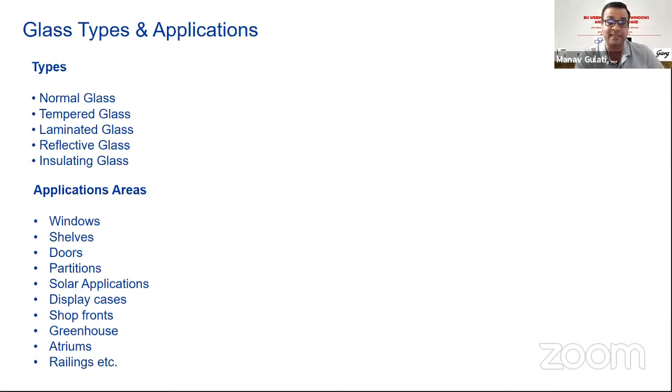The most common types of glass used in architecture these days are toughened glass and laminated glass. Toughened glass is mainly used on doors, whereas laminated glass is mainly used in railings and skylights. The advantage of laminated glass is like a car windshield—when it breaks, the glass doesn't shatter or come to your face. Similarly, in a skylight, the glass should not break and should just spread. So there are advantages to laminated glass and advantages to toughened glass, but these two are the most prominent glass types used in the building industry today.

Types of glass doors for reference: wooden frame glass door, metal frame glass door, frameless glass door—each has its own advantages. There's also fire rated and non-fire rated glass doors. There's a myth that there's no fire rated glass door, but commonly available fire rated glass doors are extensively used in most corporate offices these days. Glass doors can be single leaf or double leaf. These are the basics of the glass door.

Now coming to the technology: we can have automatic glass doors and manual glass doors. Similarly, they can be hinged or pivoted glass doors. The glass door can also be sliding—and within sliding we have manual, automatic, and glass sliding folding doors. Revolving doors can also be made of glass. So different permutation combinations are being used in glass doors today.

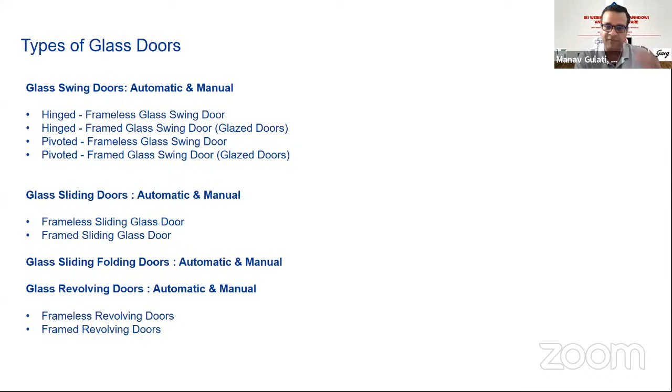Every product has a different standard. When we use a frameless glass door, there's a standard called BS EN 1154, which Sandeep ji has covered. So every product has a very different standard for its detailing.

Let's come to the most important point: when using a glass door, the most important things to keep in mind are fire, life safety, and security solutions. Take an example—an automatic sensor door. The safety of people is very important when someone is entering the building, typically like a lift door; someone should not be crushed inside the door. There are international standards drafted for this, like EN 16005, which specifies the speed of the door if someone gets struck. Typically, lift technology works on the same standard.

Another important point when designing glass doors for a building is high usage and high abuse—public buildings, shopping malls, airports, retail stores, where 10,000 people come in and go out every day. That should be kept in mind when designing the building. Aesthetics: glass actually started being used mainly from an aesthetics point of view. Accessibility solutions: are people with accessibility needs able to use these kinds of glass doors? These things need to be kept in mind when designing any glass door.

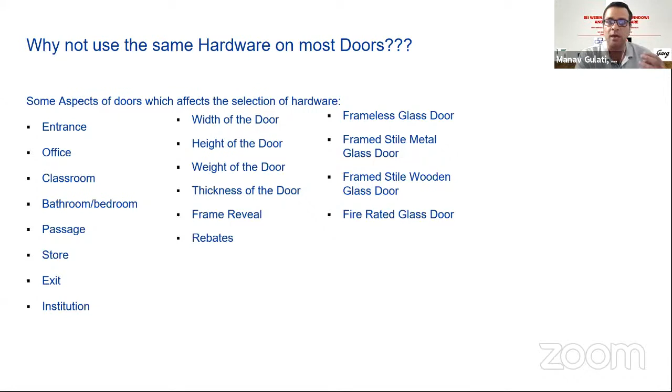There's a very wrong misconception, and in most projects we see the same sort of floor spring used in all kinds of doors. But every door has a different usage, different thickness, width, and height. The thickness of the glass is different too. So when designing glass door hardware, this needs to be kept in mind, because if you use heavy duty hardware on a light duty door, the door becomes very heavy—children of 7 to 8 years old won't be able to open it; it's not user friendly for kids. So hardware plays a very important role when designing a glass door.

To add to this confusion, security requirements sometimes conflict with safety requirements. Most of the time there's a conflict between safety and security—the more you make a building safe, the more security is compromised. Safety means that when fire happens in a building, we all need to evacuate. But if you put more and more locks, you're compromising safety. So, keeping in view the usage of the building, we need to design it accordingly.

Take airport buildings—they are practically the most secured buildings, but imagine a fire happens inside; you immediately need to evacuate the building. So depending on the usage of the building, all these things need to be considered when designing this kind of door.

Importance of code and standards while selecting door hardware is very, very important. Glass doors of different width and heights use different standards. The floor spring has a different weight carrying capacity, starting from 60 kg, 80 kg, 200 kg, to 300 kg.

Now I give you a very valid question. Someone will come and tell me they have a 300 kg door. Can I use hinges? The best answer is no, use pivots. Pivots are most of the time used on a floor spring. Are there floor springs available in the market which can carry a weight up to 200 kg or 300 kg door? Yes, the answer is yes. But by mistake, the contractor might use a hinge, and after 3 months the door will sag. So all these things are very important to keep in mind when designing any kind of door.

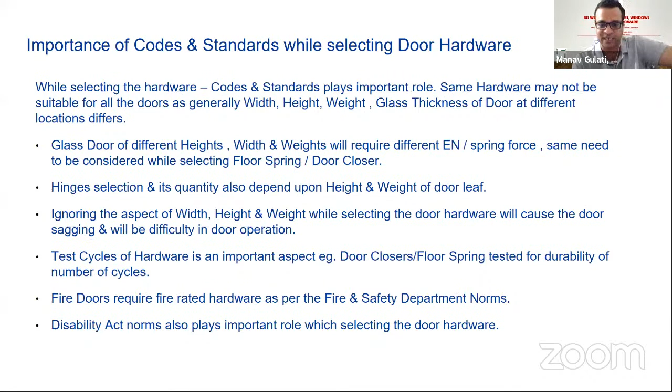Fire doors require fire rated hardware. Now, there is a myth that fire escape routes and fire doors cannot be made of glass. But products are readily available in the market where we can have evacuation doors also with glass.

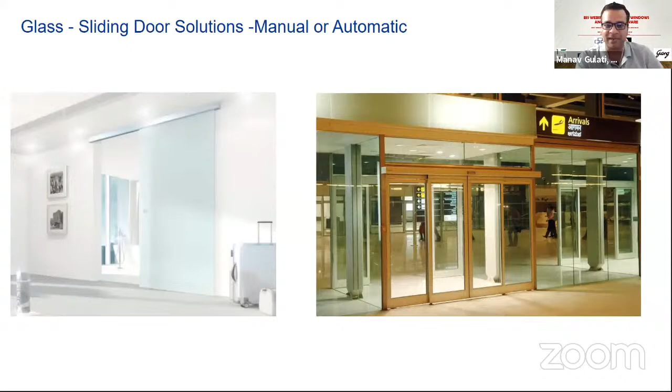Now this slide is showing the swing door, and this slide is showing the sliding door. At all the airports we go to, we enter through an automatic sliding door or manual sliding door. So this is a huge topic, a subject in itself. Probably 20 minutes is a short time, but yes, I'll try to cover as much. I have 7 more minutes left to finish it, so I'll try to finish within my time frame.

See the technology: sliding doors, telescopic sliding doors, sliding folding doors in glass, curved sliding doors. So with glass doors, we always have one thing in mind - a normal frameless glass door. But see, the technology has evolved from a frameless glass door to now go into different parameters.

Revolving doors are also made of glass. So one can have any kind of door in a building with this revolving door. One of the best advantages of using a revolving door is they are never open, they are never closed, so they will never allow outside energy or outside heat to enter inside the building.

To be very true with you, the concept of the revolving door started in Europe, Germany and US, where there were very high cold winds and the wind pressure is very high, and they didn't want to spoil the air conditioning and heating system inside the building. So that was the concept, because the moment you open a swing or sliding door, someone opens it and the wind pressure of outside goes inside the building, and the thermal efficiency of the building goes for a toss. So there the concept of the revolving door started.

But in India, where there is a lot of heat, frankly speaking, when you use a sliding door or a swing door inside a building, the moment you enter any mall, you need to put an air curtain. So all these are actually kind of a deterrent to the technology. Revolving doors play a very, very important role over there.

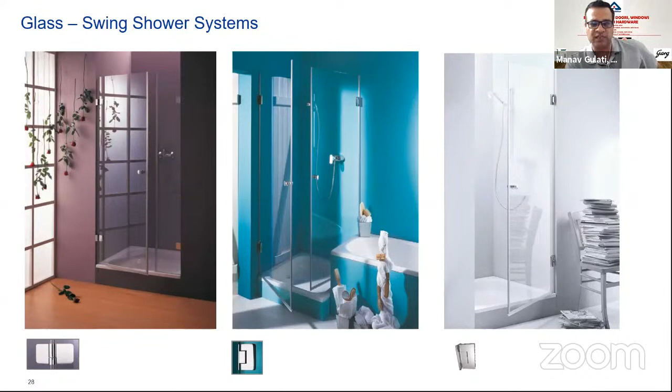Glass is aggressively used in shower systems. You go to any hotel, you find this. Now residences all have glass sliding doors, glass shower doors. We need to use toughened glass for this because of safety purposes. The sliding shower systems - here you are seeing swing door systems in glass, and these are the sliding shower systems. See how the technology is evolving.

We also have the glass operable system now. Take an example, you have a hall and you want to divide it with the help of sliding folding walls. These are all operable sliding glass doors. You have an option to park them to the side and get a complete clear span. See how the glass technology has evolved.

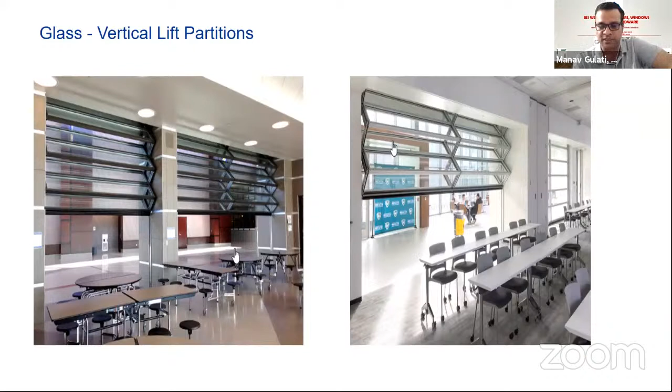Whereas when we go back, this is a glass wall. Now the glass sliding folding option can go up to the top and you can divide your banquet hall, training room, meeting room or boardroom into equal parts. So this is how the system is - this is a glass sliding folding system, mainly used in car showrooms, banquet halls, restaurants, and training rooms.

See this, so this is a kind of living room and lobby, and you have an option - this is right now in a park position. You have the flexibility to open and park them, and you get a complete play area. So there's a lot of flexibility in glass these days.

Restroom partitions in glass - that's how glass is slowly and steadily evolving in all phases of life. The reason is aesthetics. People want to see something vibrant, people want to see some color. So the design trends of all buildings have drastically changed.

Now I'll take just the last 2 minutes to end up. Very frankly, when gypsum or wood was used in India and worldwide since 2000, glass took a seat. It got converted from frameless glass technology to framed glass technology. What are the advantages of framed glass technology?

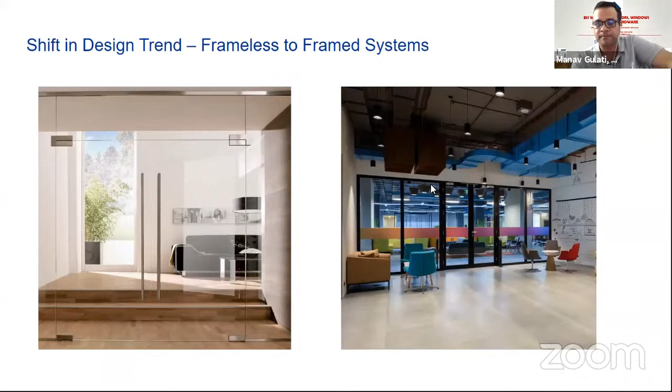The advantages of framed glass technology are that the level of acoustics you get is very high, there's more neatness, and very fast installation. When fixing a normal glass, you need to cut the floor - but this is a framed system, you don't have to cut the floor. See this - now this is a very common system. You go to any new corporate office, everywhere you see a framed glass system. So it changed over from frameless glass technology to framed glass technology.

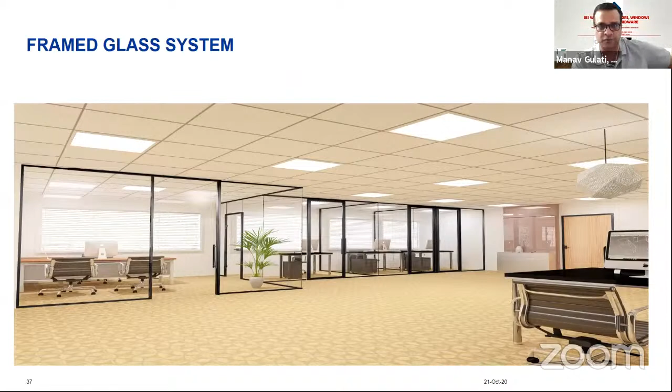Acoustics is one of the most important points when we use these kinds of glass doors, because practically the noise will not travel through the gaps which frameless glass doors have. This is a frameless glass door technology - I was showing you the frameless glass door, which was very prominent in most offices. The whole concept has now changed to framed glass.

See this - now you get a clear look, you get better aesthetics. The profiles have their own look and all. So this is something we have these days in glass technology, and all these products are readily available with most companies in India, most of whom are manufacturing manual glass sliding door systems.

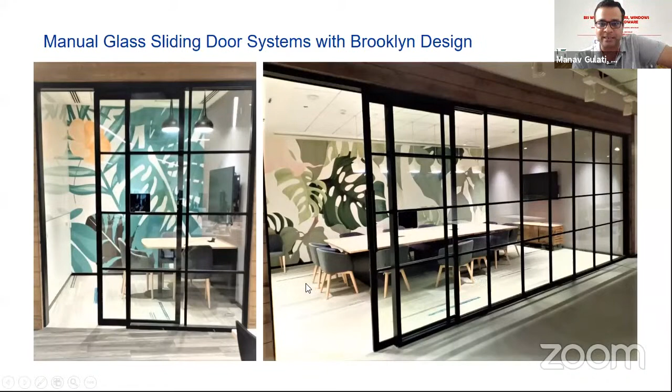Now see this - up till now we were seeing swing doors. This is a sliding door system with a Brooklyn design. These are all reference images from India only. And this is the automatic glass door with Brooklyn design. So we have options of manual and automatic - all the options are available.

But see how the look and feel of the glass, which was purely frameless up till 2015, converted slowly and steadily into framed glass, because of a few reasons, acoustics being one of the most prominent. So this is the way glass has evolved in its technology over the time frame. Slowly and steadily, yes - now frankly speaking, we are seeing even a shift away from the framed systems. Now let's see what comes next.

But this is the change in technology. The end note from my side is: whatever good things we build end up building us. That's it from my end. I hope I was able to finish within my time frame.

Okay, thank you, sir, for your nice presentation. Thank you. Manoj, one question only, sir. For Manavji. Sure, sir.

This is one question I wish to put to the speaker from dormakaba. For an ISI marked floor spring, is it must to prescribe weight capacity? Correct. And what must have been asked is for a non-ISI product, where weight capacity must not have been provided. I also remember in 6315, there is a capacity requirement that it must be able to take 125 kg of load. So that is the requirement.

Of course, we can revise it into categories. We are working with Manojji on the same subject, sir. Yes, sure. Okay, thank you, sir.